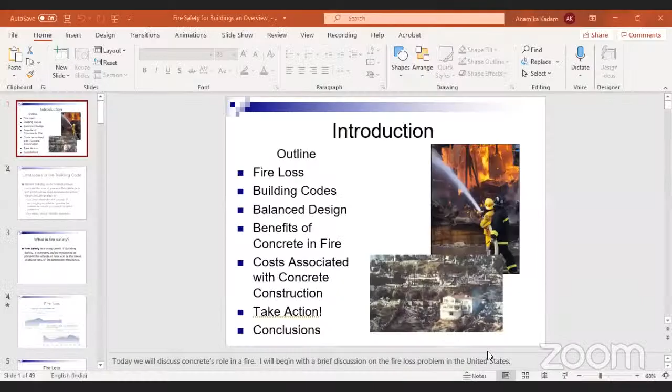I will be talking about fire losses, what are the building codes, what are the design approaches, and what benefit concrete gives as far as fire resistance is concerned. What are the costs associated with concrete construction when we design it as a fire resistant building, and what actions we should take. Then the last item is conclusions we will be talking about.

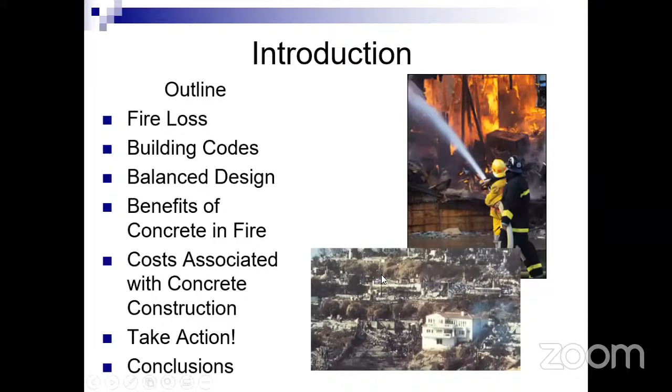So, what is fire safety? Fire safety is the set of practices intended to reduce the destruction caused by fire, and in terms of building design, it is a vital component of building safety. Fire safety measures include those intended to prevent ignition of an unintentional fire, and those used to limit the development and effects of a fire after it starts.

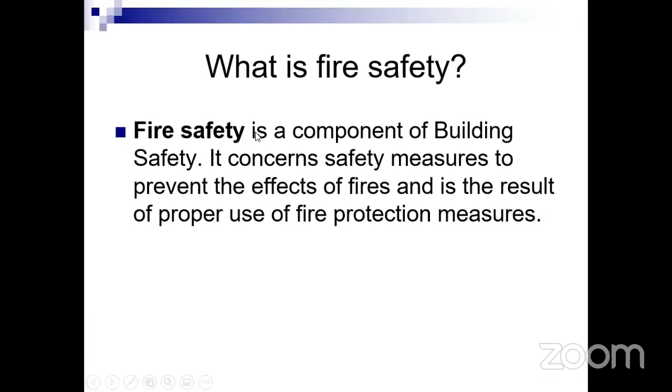So what are the proper uses of fire protection measures we should take? We will be talking about all those things.

When we talk about fire losses, more than 4,000 people die in fires each year, with one death every 130 minutes. Friends, fire kills more people than all natural disasters combined. Approximately 85% of fire deaths occur in homes.

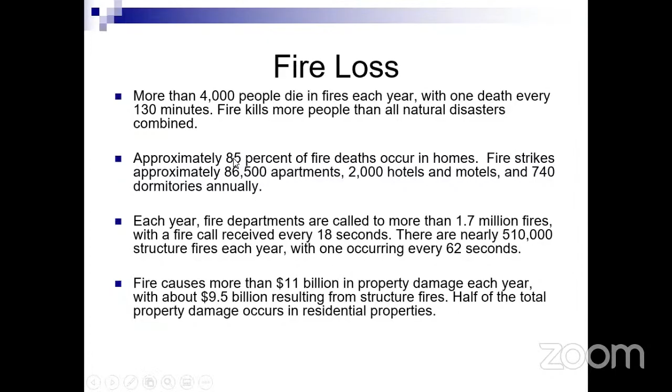So when we talk about fire loss, we should also look at the International Association of Fire and Rescue Services. As per a report of this organization in 2020, it quoted the trend of fire deaths across the world between 2014 to 2018, and the data is very alarming.

We can see that India has the maximum average deaths per year, which is 16,714. And if we take how many deaths occurred per 100 fires, we can see the lowermost two countries, Nepal and Taiwan, at serial 19 and 20, where deaths were in the tune of 7 to 8 people per 100 fires.

So we can see that USA, Russia, Japan, all these developed countries are also in the list. Great Britain, France, Italy, all are in the list when we talk about deaths due to fire.

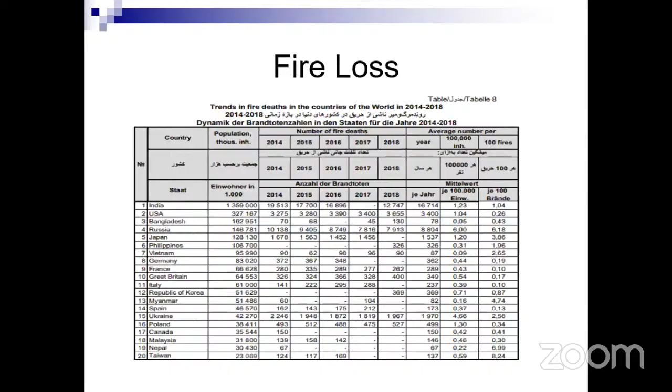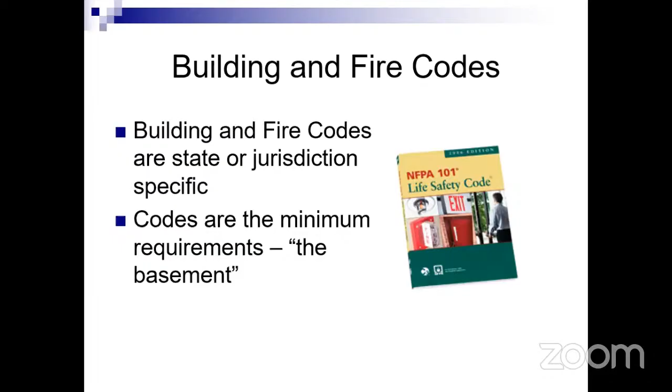Let me give a brief idea that building and fire codes are both state or jurisdiction specific, and when designed for any particular requirement, say fire, the codes give the minimum requirements for any particular structure.

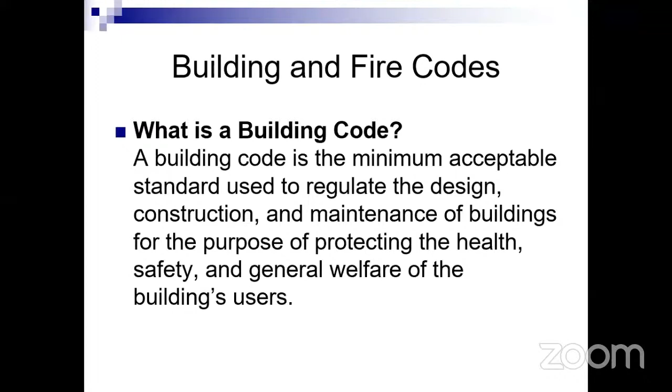So what is a building code? A building code is a minimum acceptable standard used to regulate the design, construction, and maintenance of buildings for the purpose of protecting the health, safety, and general welfare of the building users.

When we talk about up-to-date building code as far as fire criteria is concerned, a building code is nothing but a set of rules that specify the standards for constructed objects, which may be building or non-building structures as well.

Buildings must conform to the code to obtain planning permission, usually from the local council. The main purpose of building codes is to protect public health, safety, and general welfare as they relate to the construction and occupancy of buildings and structures. The building code becomes law of a particular jurisdiction when formally enacted by the appropriate government or private authority.

So when we say our building codes are up to date, they must ensure safe buildings. It ensures a reduction in deaths, injuries, and property damage, and it preserves the built environment. It reduces public and private disaster aid, and it maintains employment and businesses.

When our codes are up to date as far as fire practices are concerned, it gives a level playing field to engineers, builders, and suppliers. It gives economies of scale, maintains quality of life, and property values escalate when our buildings are fire safe.

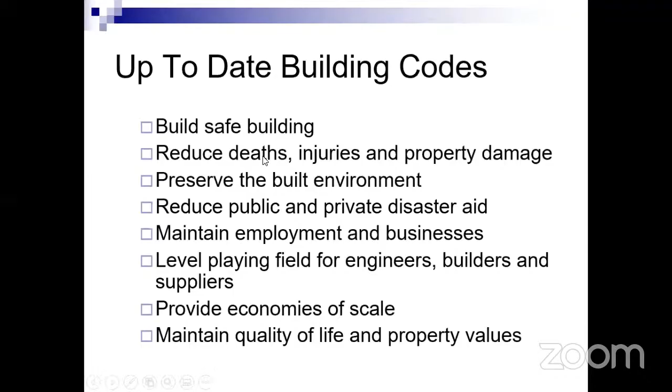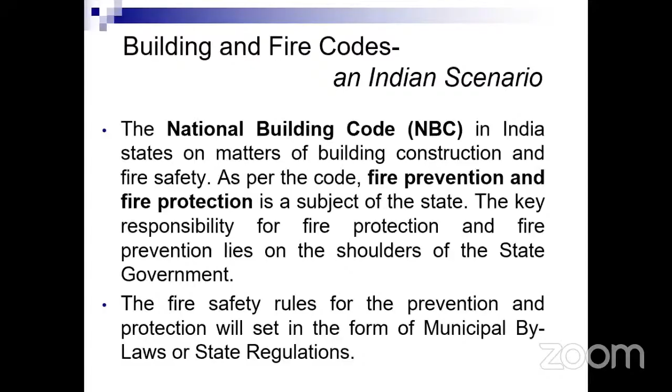In the Indian scenario, we use NBC, the National Building Code. As per the code, fire prevention and fire protection is a subject of the state, and the key responsibility lies on the shoulders of the state government. The fire safety rules for prevention and protection are set in the form of municipal bylaws or state regulations as per NBC.

Now I am quickly touching on the basic parameters which we consider in design when we design structures for fire resistance. We take a balanced design approach, where we establish the importance of passive design, including compartmentalization, in combination with active design to deliver a more comprehensive fire protection system.

In simple terms, what is active fire protection? Fire protection systems that must be activated to perform, such as sprinklers or smoke detectors, come under active fire protection. What is passive fire protection? Fire resistance provided by elements which inherently resist fire, such as non-combustible precast concrete and masonry structures, gives us passive fire protection.

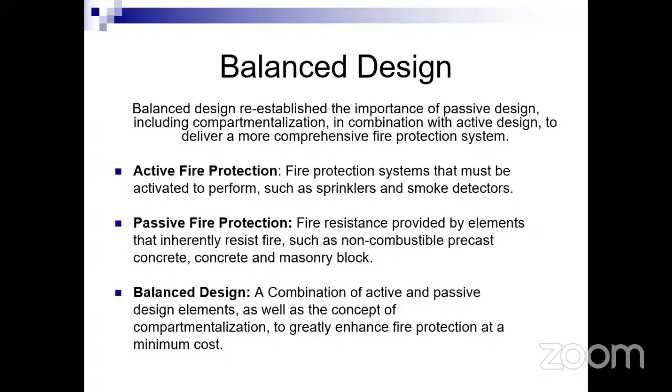So what is balanced design? When we utilize both aspects in our construction and design, active and passive fire protection are amalgamated and used in a cohesive manner, giving compartmentalization to greatly enhance fire protection at minimum cost. Such a design is known as balanced design.

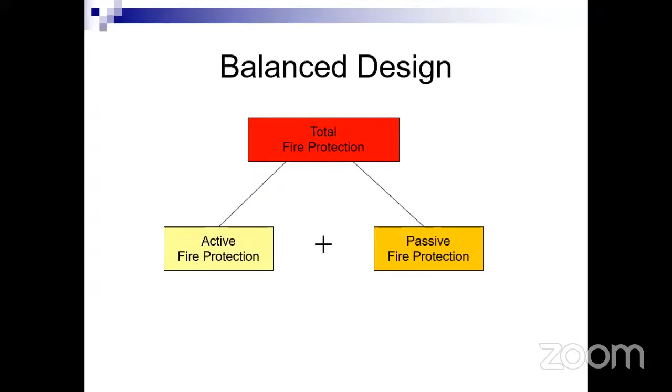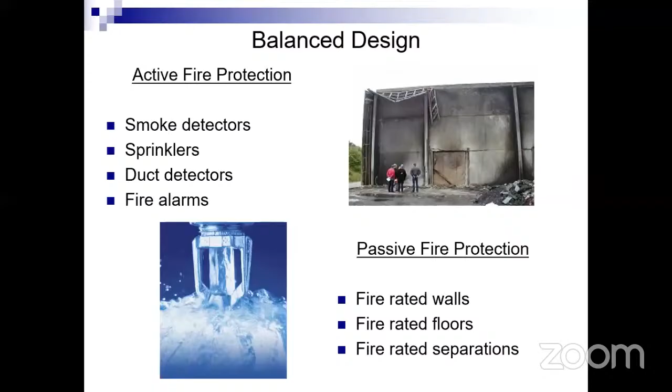So in a very simple basic rule, if we talk about balanced design of total fire protection, then we utilize active fire protection and passive fire protection both to give us a total fire protection. So what are the examples for active fire protection? These may be smoke detectors, sprinklers, duct detectors, and fire alarms. All come in the active fire protection category. And when we talk about passive fire protection, our fire rated walls, fire rated floors, fire rated separations, which we design as a structural element within the structure, are all known as passive fire protection enhancers.

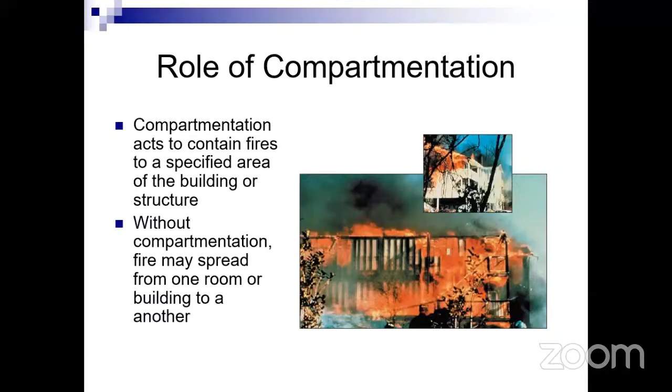So what does compartmentation do? Compartmentation acts to contain fires to a specific area of the building or structure. With compartmentalization, a fire doesn't spread from one room to another room or from one building to another building.

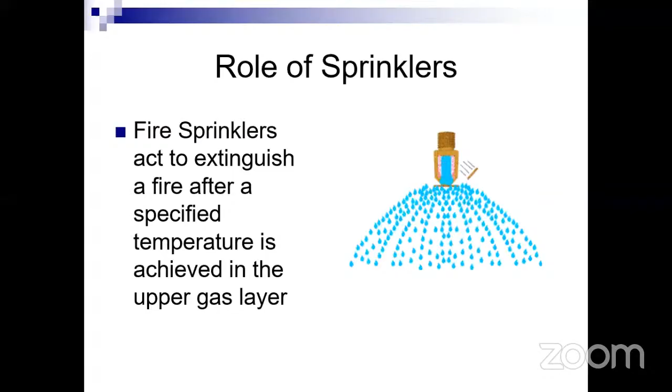So what is the role of sprinklers? Fire sprinklers must act and be activated to extinguish fire after a specified temperature is achieved in the upper gas layer. Accordingly, fire sprinklers are designed in buildings. And we design sprinklers as per NFPA standards. There are NFPA standards, NFPA 13, 13D, 13E, 13R, which are utilized for the sprinklers.

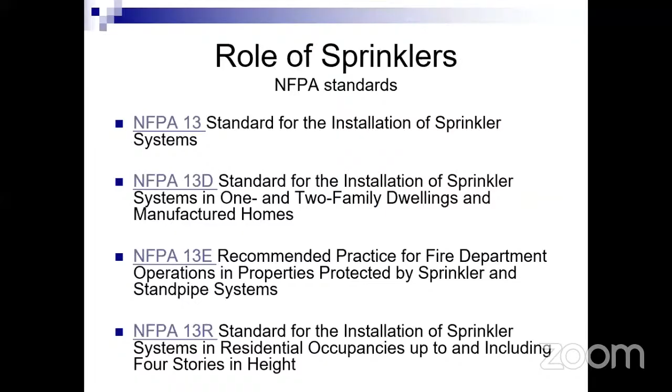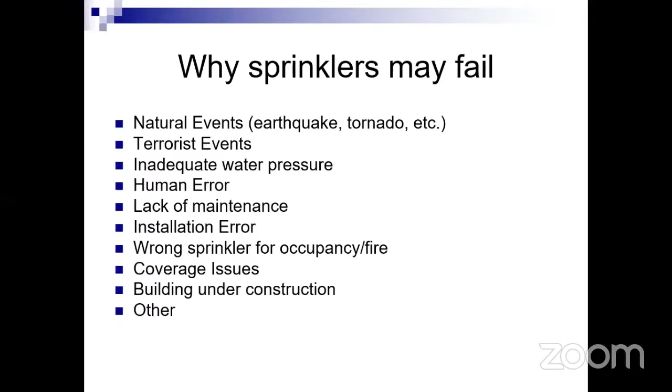And why may sprinklers fail in any particular building which we have designed adequately? There may be a lot of reasons. Some are listed here, like natural events, earthquake, tornado, etc. In case of a terrorist event, when the water pressure is inadequate, or there may be human error involved. There may be lack of maintenance, or installation error itself, wrongly designed sprinklers for the type of occupancy or the fire. Coverage issues may be there, or the building may be under construction, and there may be an event of fire and the sprinklers actually were not activated at all till that time. So there may be a lot of reasons why sprinklers may fail.

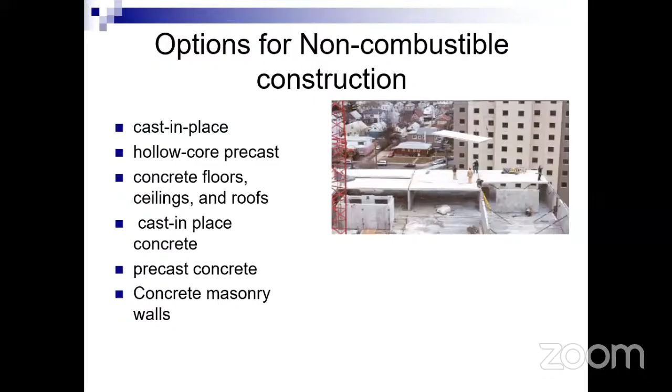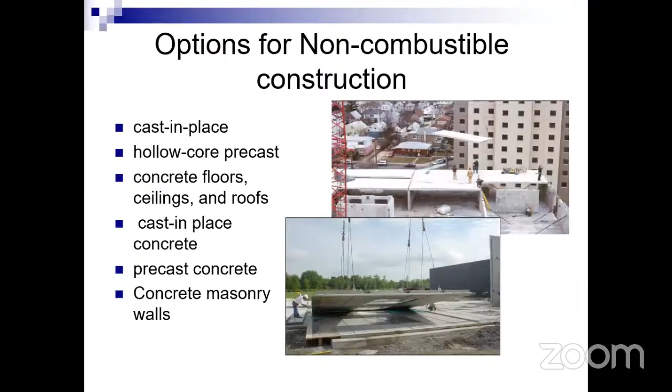Okay, what are the options for us for non-combustible construction? We can use cast in place or precast concrete elements. We can use hollow precast or hollow core concrete elements. We can use masonry walls as non-combustible construction, ways to achieve non-combustibleness of the structure.

There are advantages to developers, to communities, to the inhabitants when we say that this particular construction is non-combustible construction. So first we talk about owners or developers. The advantage I'm getting as an owner is the speed of construction. Faster sales and resale value are achieved, operating cost is lower, insurance cost is also lower, maintenance cost is lower, energy costs are lower, and I have listed here so many benefits. It appeals to investors more. It gives us proven performance, and it is resistant to seismic and high wind damage as well.

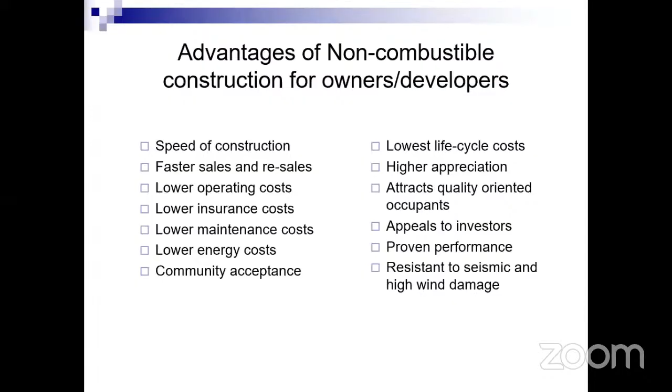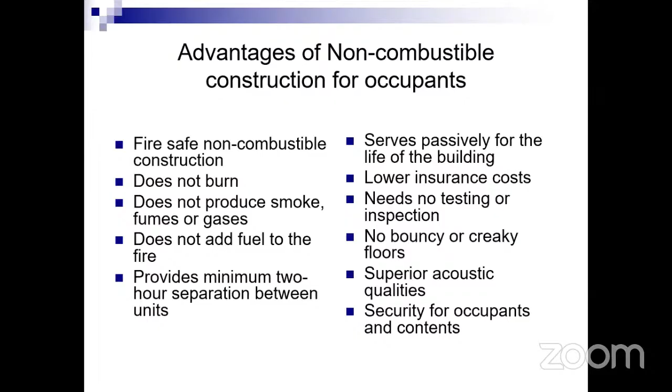So what advantages do we get as occupants from non-combustible construction? Fire safe non-combustible construction will not burn. It will not produce smoke, fumes, or gases. It will not add fuel to the fire. It provides minimum 2 hour separation between units. It gives a better chance of survival. It gives lower insurance cost, no need for further testing and inspection, no bouncy or creaky floors, superior acoustic qualities, security for occupants and contents.

So when we talk about communities, what advantages do we get for communities at large? Lower risk and exposure for fire services, more efficient use of fire services. Construction does not add fuel to the fire. Fire is contained. Adjacent units are protected. Structural collapse is unlikely. Provides a quality community asset for many decades. Community recognized for its fire safe construction. Provides a stable tax base for the community. Attracts long-term investors to the community.

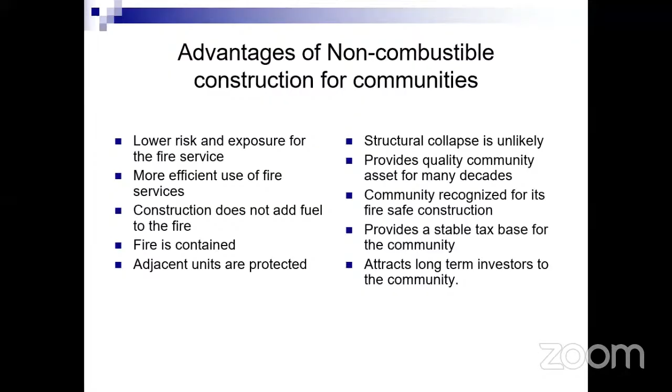Now again, let me explain fire containment. Fire containment is actually the last line of defense when the sprinkler has failed. To be effective, walls and floors or ceilings that provide compartmentation should be of non-combustible construction with at least 2 hours of fire resistance, so that fire can be contained.

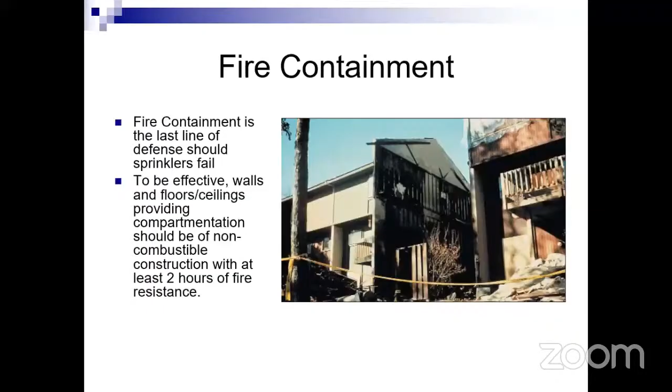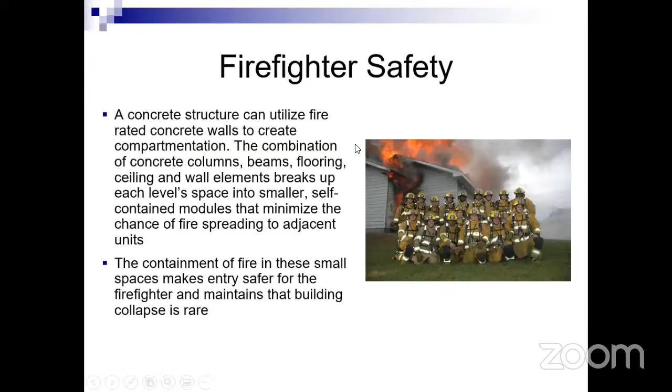How do we ensure firefighter safety? A concrete structure can utilize fire-rated concrete walls to create compartmentation. The combination of concrete column, beam, flooring, ceiling, and wall elements breaks up each level's space into smaller, self-contained modules that minimize the chance of fire spreading to adjacent units. The containment of fire in these small spaces makes entry safer for the firefighter and ensures that building collapse is rare. So in turn, we ensure firefighter safety also by making non-combustible buildings.

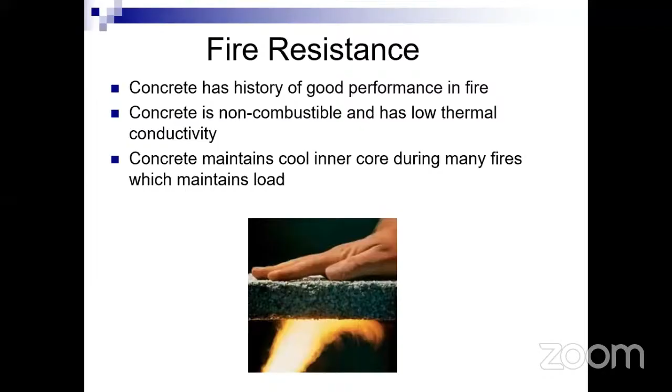So when we talk about the fire resistance property of concrete, concrete has a good history as far as performance related to fire resistance is concerned. Concrete is non-combustible and has low thermal conductivity. It maintains an inner cool core during many fires, so that it can maintain its load carrying capacity as well.

So as we design a structure, a fire resistant structure will be designed for live load, dead load, and fire. So what is the goal we want to achieve? We want to achieve structural stability. We want to reduce spread of fire. We want to experience total burnout, but without collapse.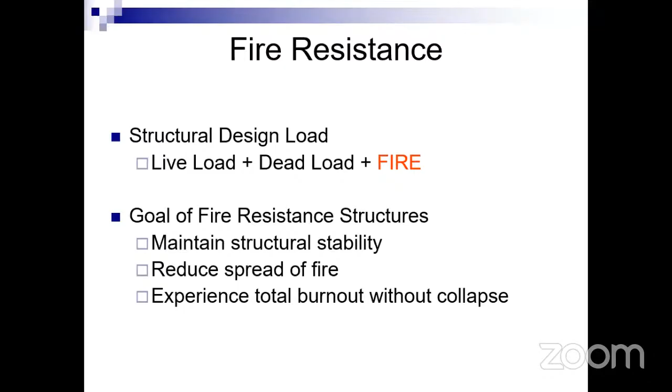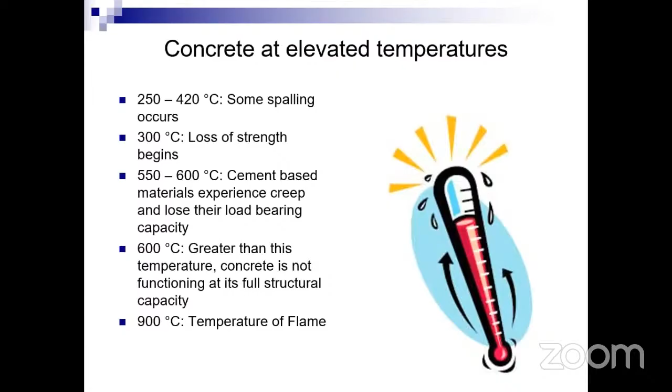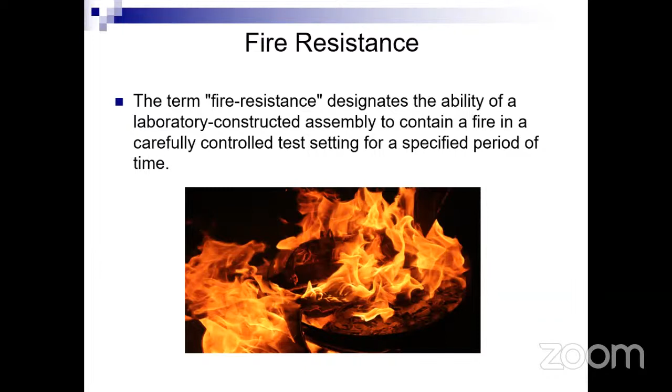So the term fire resistance designates the ability of a laboratory-constructed assembly to contain a fire in a carefully controlled test setting for a specified period of time. That is the term fire resistance. ACI 216 is the standard method for determining fire resistance of concrete and masonry construction assemblies.

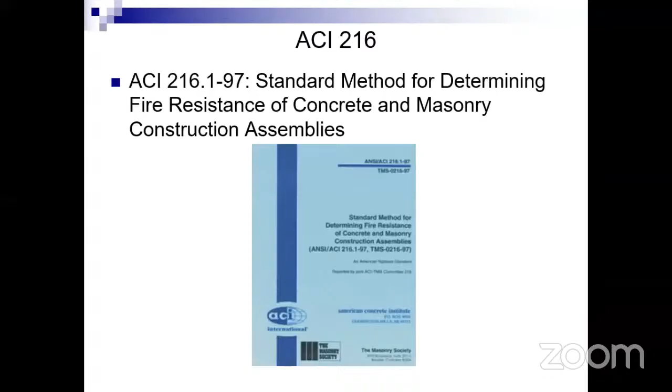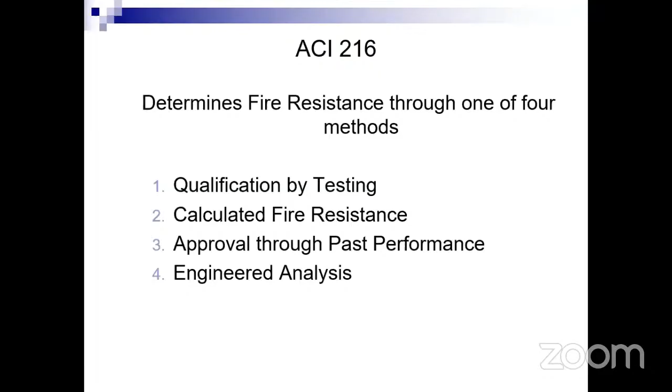Basically, there are 4 methods given to determine the fire resistance of any particular structure. It may be through qualification by testing, or we may calculate fire resistance. The third method is approval through past performance of that particular type of structure, area, dwelling, or type of usage. The fourth method is engineered analysis to determine the fire resistance of the structure.

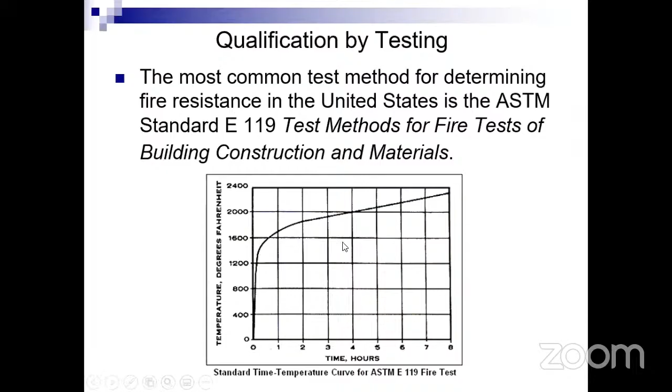When we talk about qualification by testing, the most common method utilized is ASTM E119, the test method for fire tests of building construction and materials. A standard time-temperature curve is used for it. When we talk about calculated fire resistance, the fire resistance associated with an element or assembly shall be deemed acceptable when established by the calculation procedure set in ACI 216.

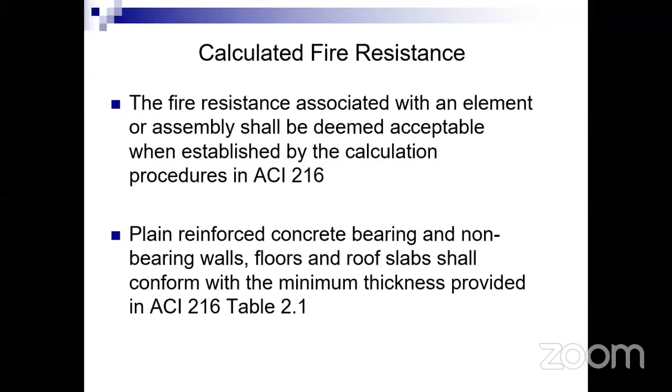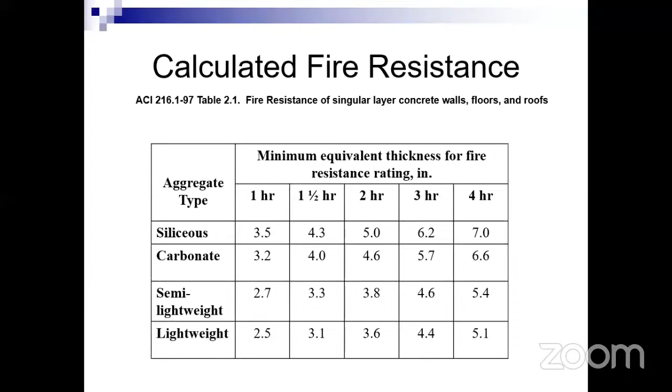Plain and reinforced concrete bearing and non-bearing walls, floors, and roof slabs shall conform with the minimum thickness criteria given in this ACI. So what are the minimum thickness criteria? We can see here that for 1, 1.5, 2, 3, or 4 hour fire, for various aggregates, the thickness of the element is given. Lightweight or semi-lightweight concrete elements have better fire resistance in terms of thickness and give less structural cost than siliceous or carbonate aggregates. The choice of aggregate directly impacts the performance of concrete during a fire.

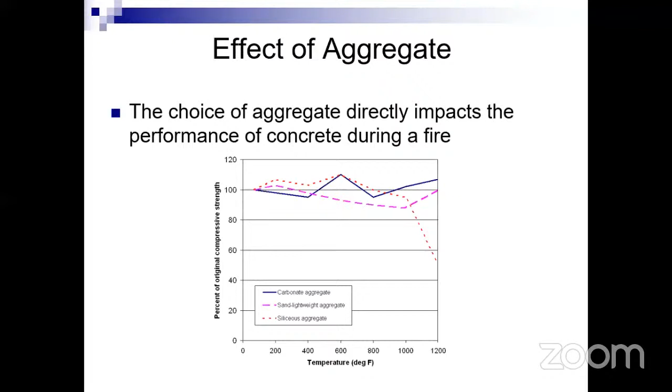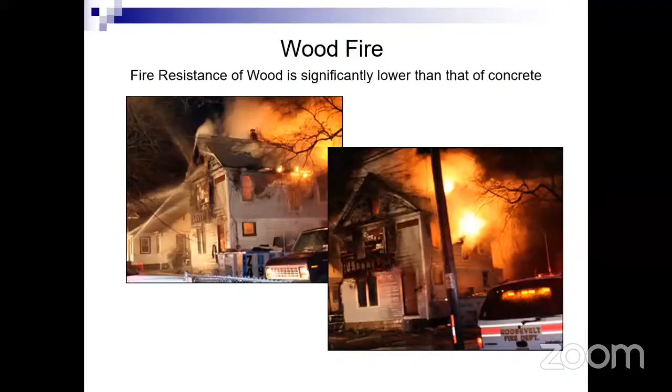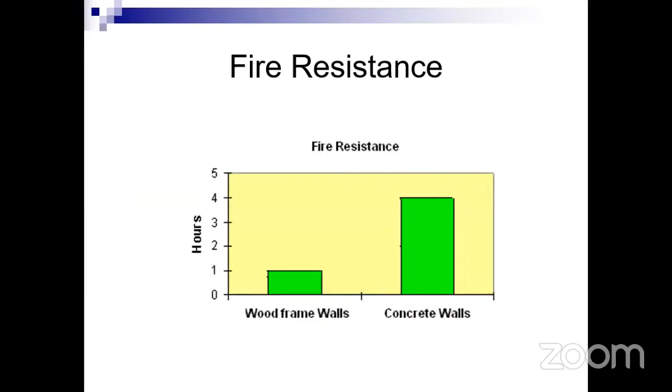There are many countries where old structures were made of wood, and the fire resistance of wood is much lower than concrete. In this graph, any concrete wall will bear fire for at least 4 to 5 hours, whereas wooden frame walls can only stand 1 hour of fire. The strength of wooden structures at elevated temperature falls very sharply, while concrete structures with different aggregates perform at almost 100% strength at elevated temperatures up to 600 degrees Fahrenheit.

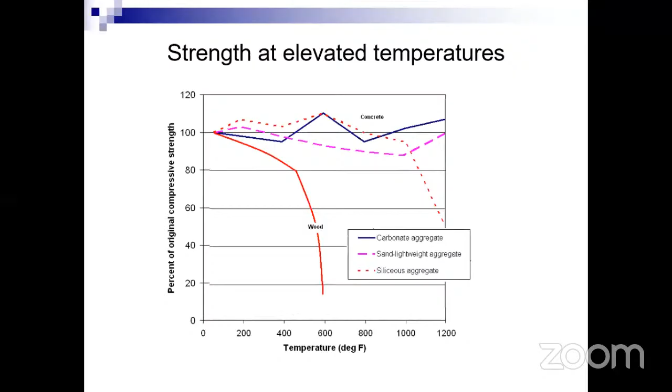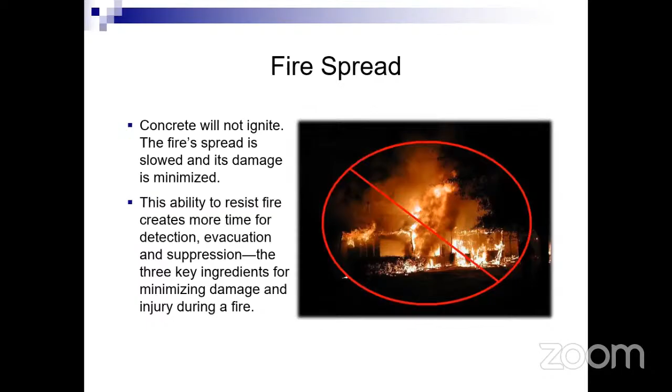When we talk about fire spread, a concrete structure will not ignite. Fire spread is slowed and damage is minimized. Secondly, the ability to resist fire creates more time for detection, evacuation, and suppression, the three key ingredients to minimize damage and injury during a fire. In wood, flame spreads like a wildfire, while in concrete flame spread is almost null compared to wooden structures. So concrete limits the flame spread.

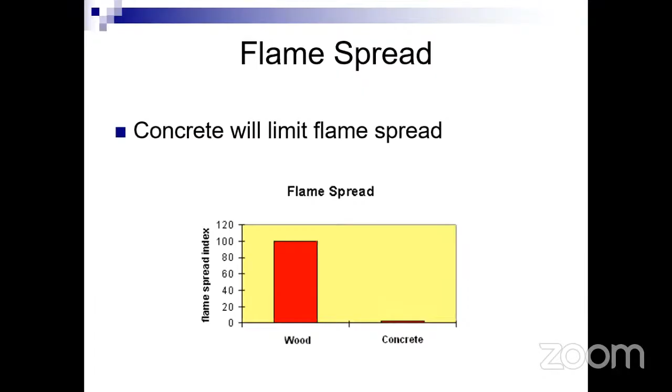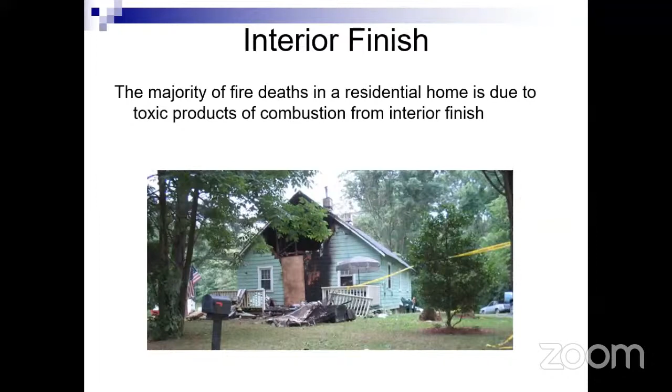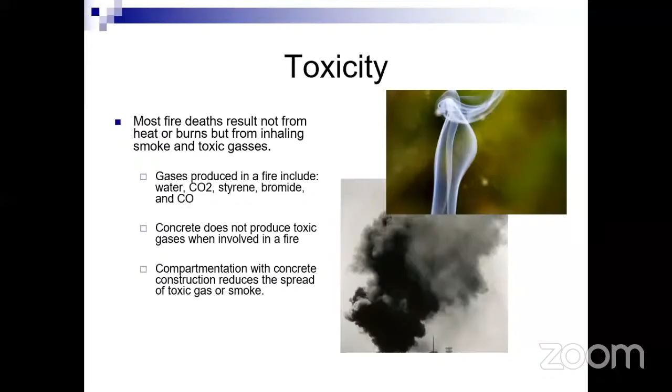Interior finishes also play a very important role in dwelling units. The majority of fire deaths in a residential home are due to toxic products of combustion from interior finishes. Most fire deaths result not from heat or burns, but from inhaling smoke and toxic gases, such as water, carbon dioxide, styrene, bromide, and carbon monoxide. Concrete does not produce toxic gases in a fire. And if compartmentalization is done with concrete construction, it reduces the spread of gases.

So with the balanced design approach: safe buildings for occupants, a non-combustible building material that provides safety, and construction at similar cost to other construction methods.

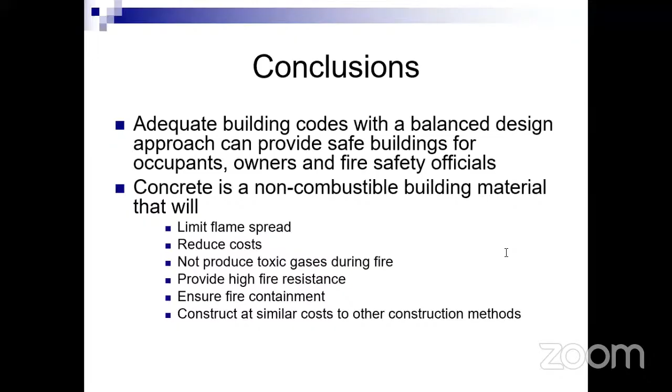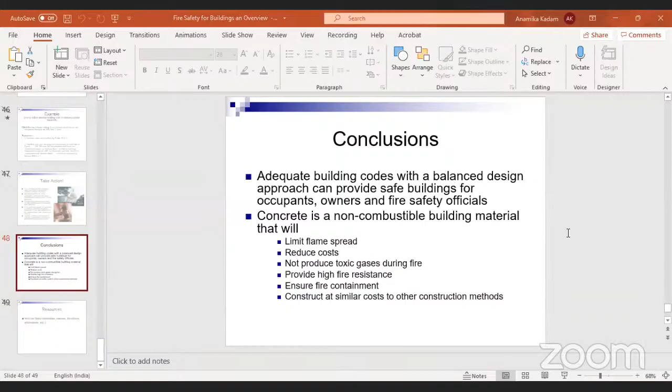Apart from that, in my current project, we are making... will go through. There is one more presentation with me, which I will... just a minute.

So in my current project, we are making a terminal for GMR. What fire safety provisions we have, in a very brief manner, I'll try to show to you all. Terminals handle large volumes of passengers. It is mandatory to ensure adequate fire safety in airport buildings. We have standards to provide fire safety. As I have already explained, there is active fire protection and passive fire protection.

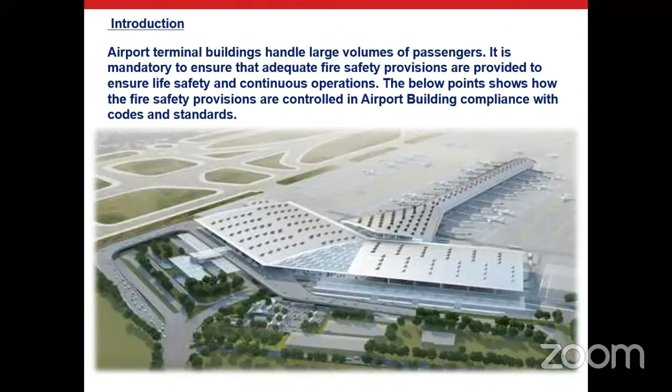So airport terminal buildings handle large volumes of passengers. It is mandatory to ensure that adequate fire safety provisions are provided to ensure life safety and continuous operations. Below we can see how safety provisions are being taken care of here. We are utilizing both forms of protection, active fire protection and passive fire protection. Active fire protection can be controlled manually and automatically. Manually, we are utilizing extinguishers, hydrants, etc. Automatically, we are utilizing sprinklers, and a gas suppression system is being designed as a mode of active fire protection.

As far as passive fire protection is concerned, an integral component of structural fire protection and fire safety in a building, that is fire rated walls, floors, doors, etc., are being designed here. When we talk about the three key approaches for fire safety provisions, there come firefighting features: there is a fire command center, remote annunciation panels are placed, and fire escape corridors are being designed.

For occupant evacuation management, a public address system and voice communication system are being designed. Exit staircases are planned adequately, and fire escape corridors are there. For smoke spread management, fire rated staircases and fire escape corridors are planned. Pressurized exit and access corridors are being made. A smoke extract system is placed. Lift lobbies are there. Dampers like fire smoke, fusible link, motorized smoke ventilation, all those systems are in place.

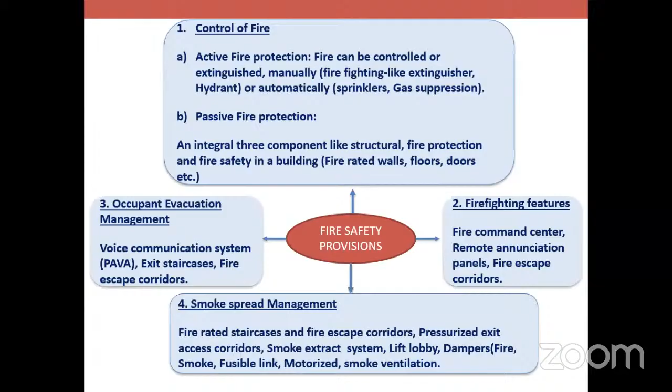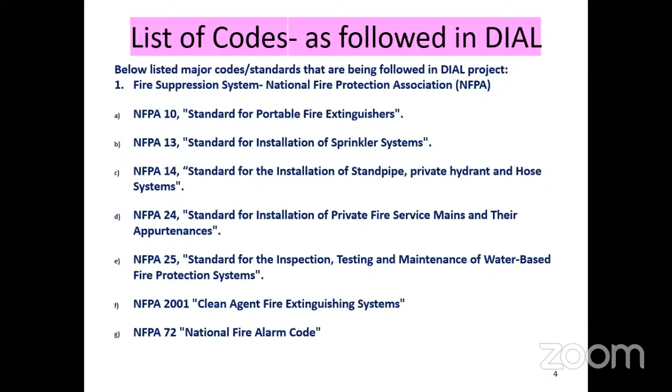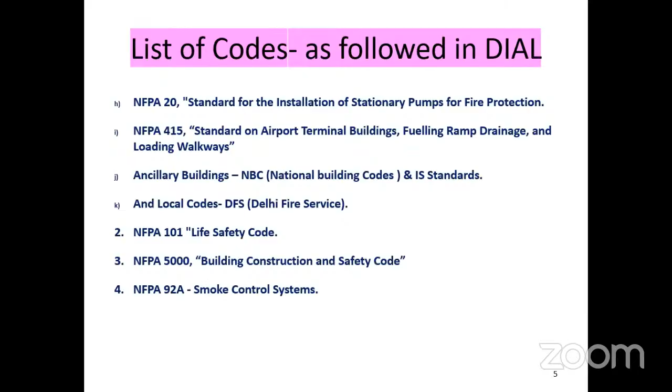So what codes are we utilizing in this project? We are utilizing NFPA for the fire suppression system: NFPA 10, 13, 14, 24, 25, NFPA 2001, and last but not least NFPA 72, the National Fire Alarm Code. Apart from that, another important aspect gaining momentum nowadays is fire resistant steel. I wanted to give you a small presentation on fire resistant steel, given to us by SAIL, who have experimented and developed a system for fire resistant steel. So let me start that.

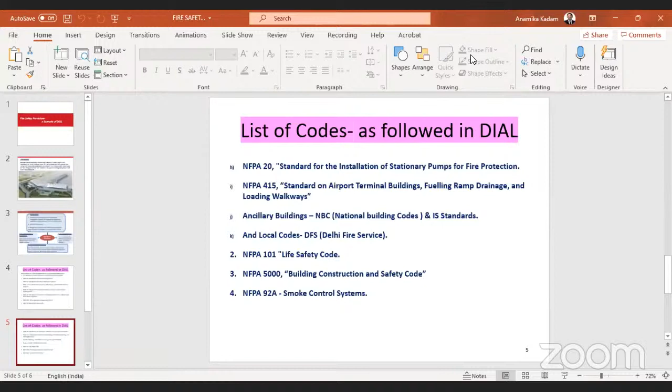Okay. So is my screen presentable? Yes, ma'am. So now you'll share the third presentation. Yeah, that's still going to come. Let me share. We are able to see your folder in which you have the three presentations. The presentation has not come up yet. Now it's there. Thank you very much, ma'am.

So at present, fire protection of steel structures is being met through coating, insulation, etc., which is very costly because of the labor, shelf life, etc.

Fire resistant steels are becoming mandatory in developed countries, and SAIL has developed fire resistant steel as per IS 15103, where the yield strength at 600 degrees centigrade shall not be less than 2/3 of the specified yield strength at room temperature. So SAIL has developed it in two sections, namely NPB and WPB sections, capable to produce in all sectional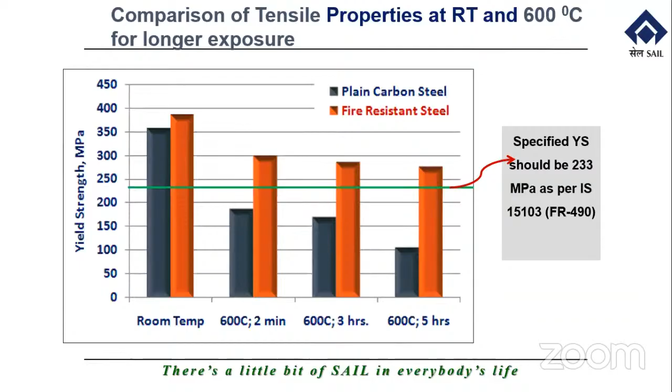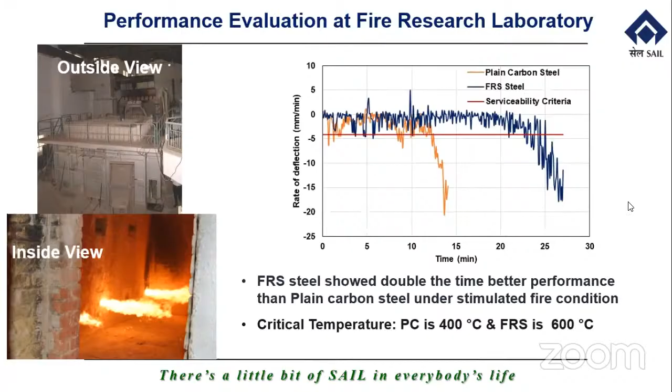Critical temperature for plain carbon steel is 400 degrees centigrade only, and for FRS it is escalated up to 600 degrees centigrade. Now, yield strength remained significantly higher than the specified level, and no deterioration is observed when fire resistant steel is exposed to fire, which we can see here in the graphs.

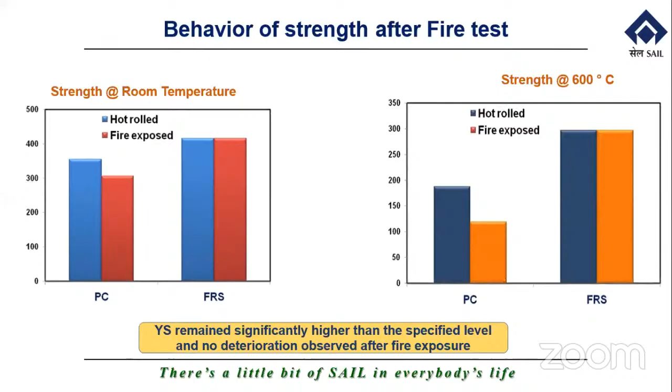So the newly developed fire resistant steel by SAIL not only met all the requirements of IS 15103, but has also performed very well under elevated temperatures, which we can see here till 600 degrees centigrade. There is absolutely no deterioration in properties of fire exposed FRS steel. Hence, FRS steel can be reused again after fire.

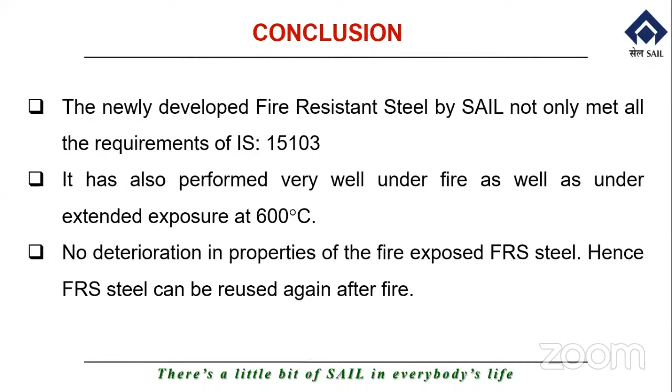So the future is very, very promising for all of us, where maybe plain carbon steel will vanish from the scene, and we will be utilizing fire resistant steel apart from our concrete structures.

Ms. Anamika Kadam has very nicely summarized the different nomenclatures related to fire protection and fire safety. She has talked about the different building codes, especially the NFPA, that is National Fire Protection Association codes. She's also talked about the balanced design approach for fire protection and how compartmentalization helps during a fire and can be very nicely used for fire protection. Also, what are the various benefits of fire construction.

And she's also given us an overview of the different aspects of fire resistant steel, which was one of the very important questions put up by our participants, who wanted to know about fire protection in steel and what type of steel should be there. So you have already covered it, ma'am. And you have also given us the statistics.

We talk about various hazards like earthquakes and wind engineering. Wind and earthquakes are the two prominent hazards which are already talked about, whereas fire is also one of the disasters, a man-made disaster I could say, which is very hazardous, and it leads to a lot of damage both to life and to structures.